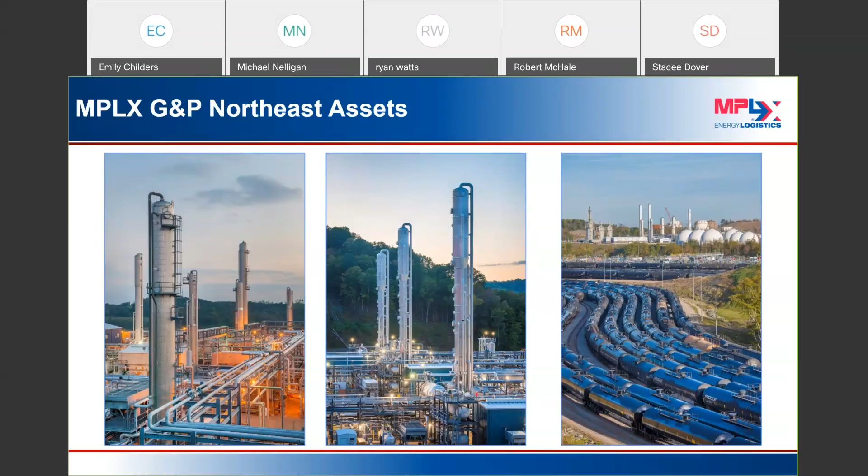Just a little fun fact for everybody. One of our smart engineers calculated the number of rail cars we load on an annual basis and translated that out to feet. And as it turns out, if you had a straight track from Pittsburgh to Tulsa, Oklahoma, you could walk all the way from one location to the other and never touch the ground. So it's a pretty significant amount of rail cars, but I'm not here to brag. I'm just giving you a little bit of information about who we are, what we do.

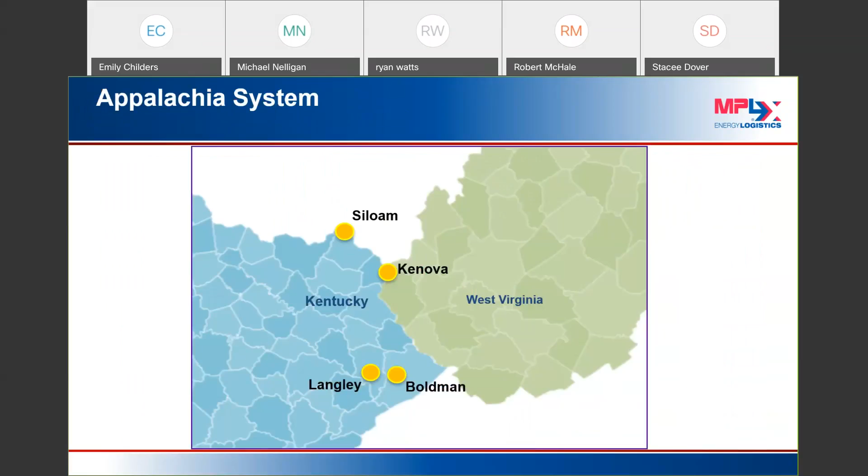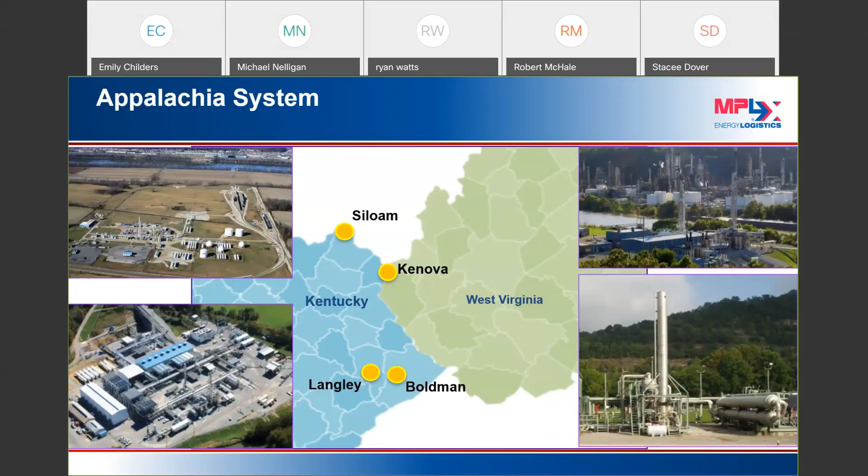All right, so our presence in the Appalachian system, actually MarkWest got its start there in Siloam, but our facilities include, let's see if I can, there we go. Having a little technical difficulties, folks, bear with me. So our facilities include the Langley facility and Boldman, not too far away, just over in Pike County. Our Kenova facility, which is located just across from Marathon Petroleum's Catlettsburg refinery. And then the picture in the upper left there is our Siloam facility, the beginning of MarkWest in its current configuration.

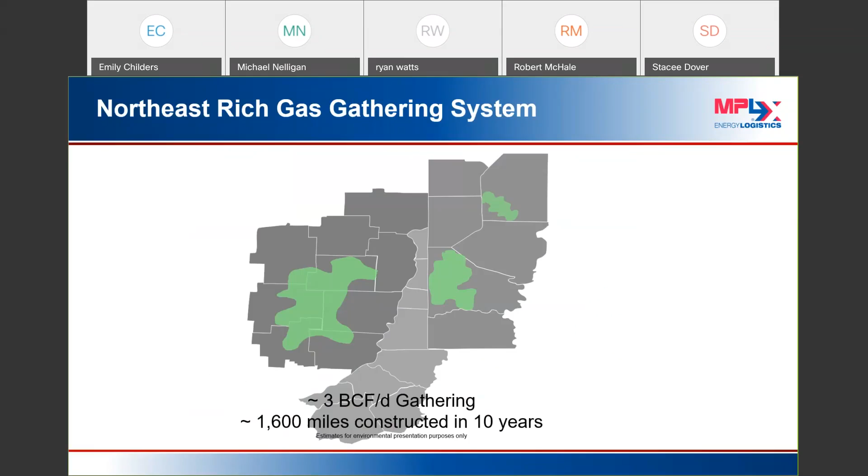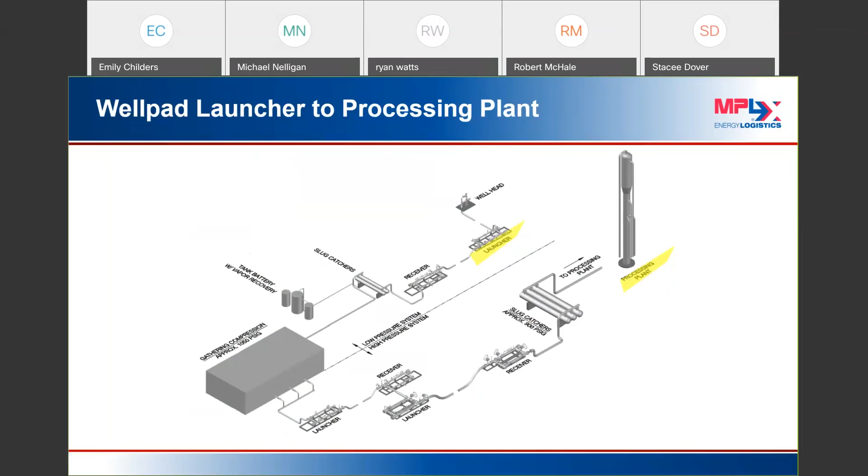All right, so where we pick up is from, let me see if I can make this work. There we go. We pick up from the launcher at the well pad and all the assets in between, from the low pressure receiver, slug catcher, down to the compressor station, and on the high pressure discharge of the compressor station all the way back to the processing plant. So all of those things are the things we own and operate.

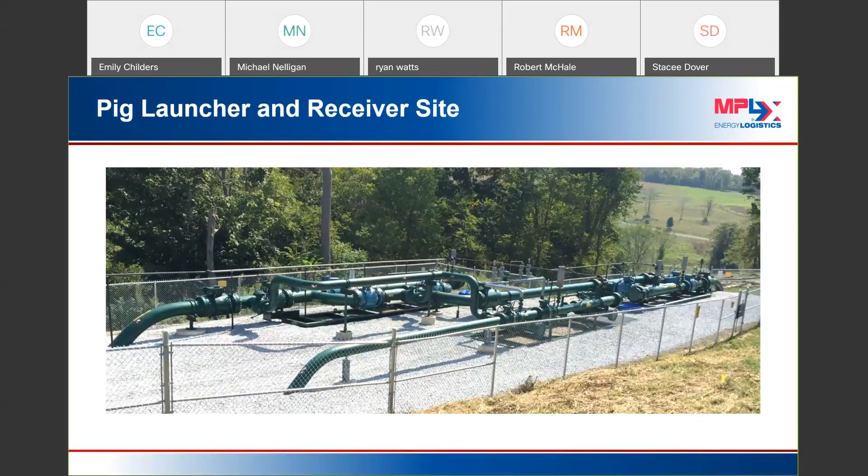All right, just for folks that may not be intimately familiar with pigging, this is a typical, or at least it was a typical launcher receiver site, a remote site, not located at a compressor station.

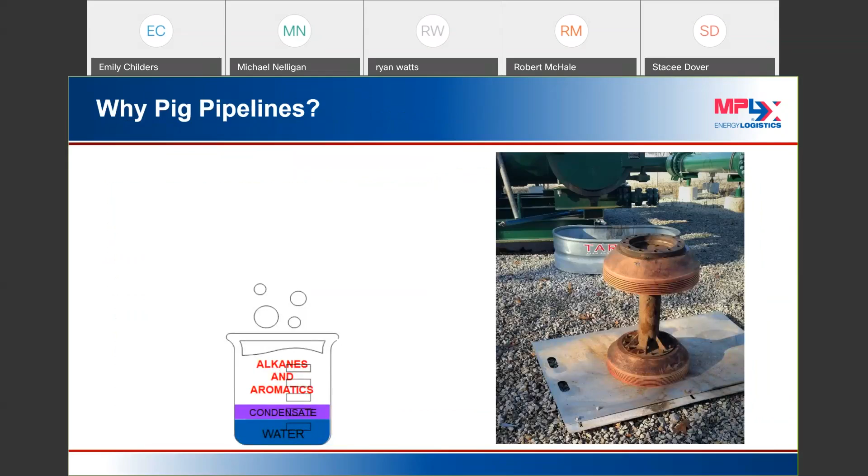Okay, so why do we pig the pipelines? There's a variety of reasons. Number one, you want to manage pressure drop and keep your optimal flow for your producer customers. Number two, you want to keep the liquids, those things that are valuable, moving forward, going from the well pad to the compressor station to the processing plant. You want to recover as much of that and return as much of that as value for the producer customers. We obviously want to manage internal corrosion, so by pigging and keeping the lines clear, we minimize internal corrosion, and we want to prevent the buildup of paraffins in the pipeline.

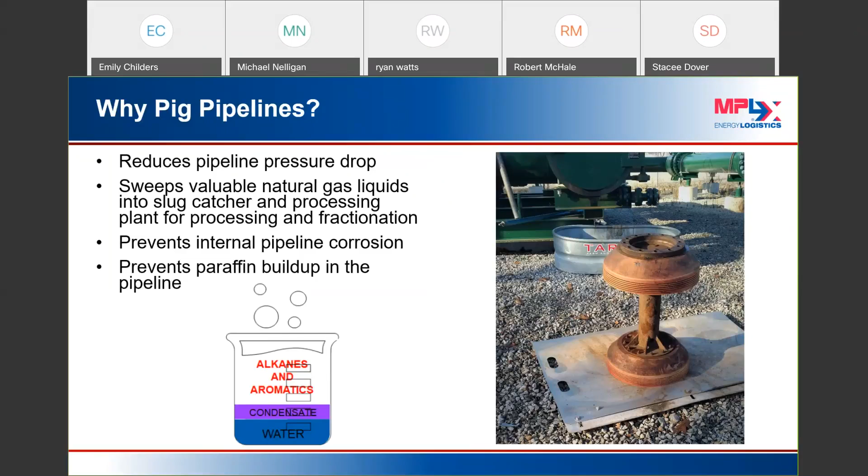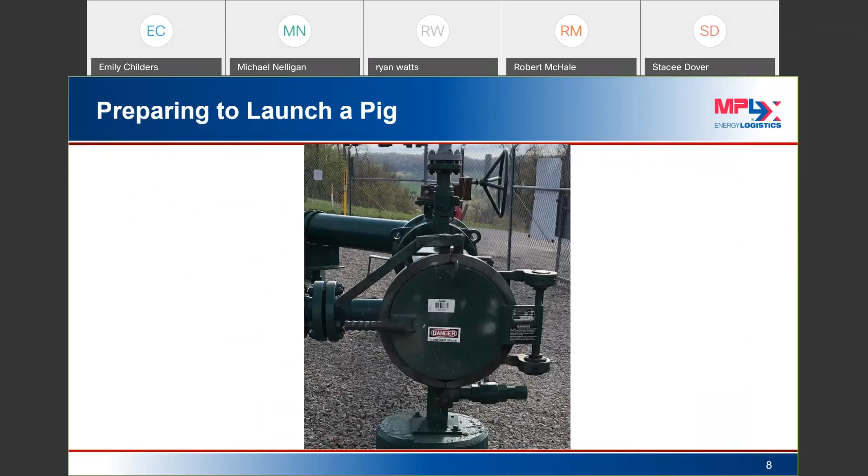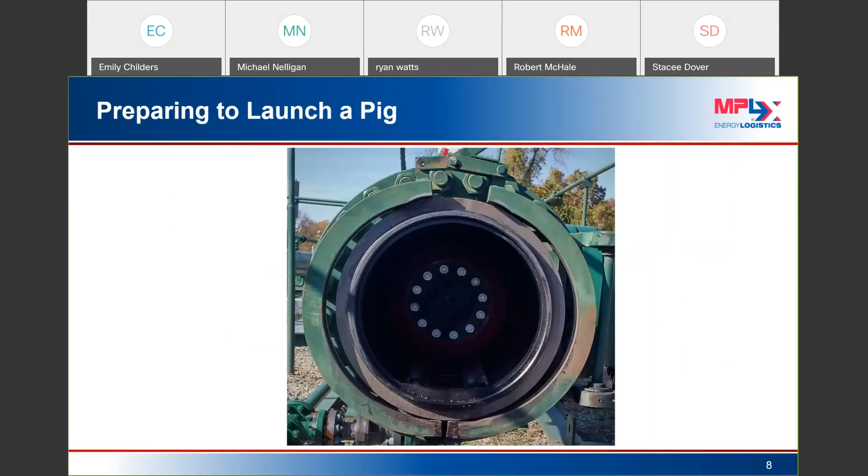Okay, so I'm going to hope that the pictures work on this. We're just going from a closed barrel of a pig launcher to the pig ready to be launched, to loading the pig. All right, to the pig ready to go. Now, I assure you that we will get to something that folks will find beneficial in this. But this is, again, just a little bit of introduction for those that are not intimately familiar with the actual pigging process. So let's see if the little animation works here.

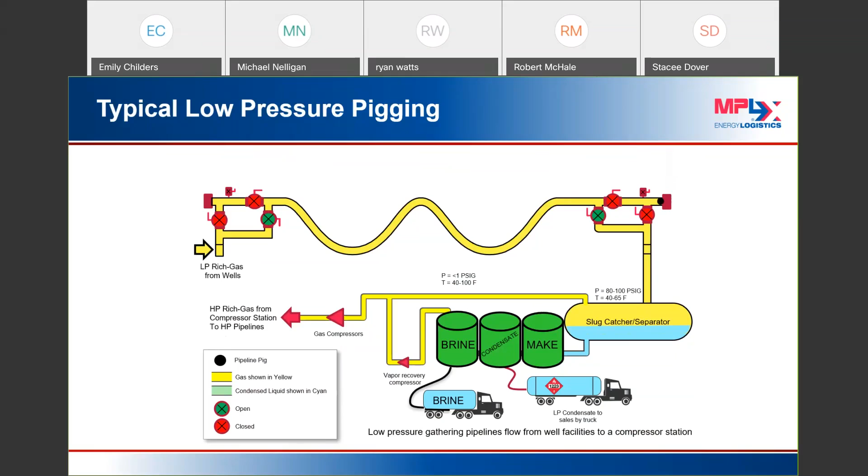All right, now, I had mentioned at the beginning of this discussion that we were the recipients of the first of its kind consent decree, and it was focused around air emissions. We're sharing this information with everybody so that if you are not routinely engaged in evaluating air emissions from pigging, it might be worth taking a second look. And each state has a different threshold for what is acceptable emissions.

So for example, Pennsylvania has a 2.7 ton per year per site limit. This is in VOCs, okay? Now, Ohio actually has a 10 pound per day per unit limit. And what we have found through evaluation is the pound per day limit is actually the greater challenge of all the things here versus tons per year. Pounds per day is by far the most challenging.

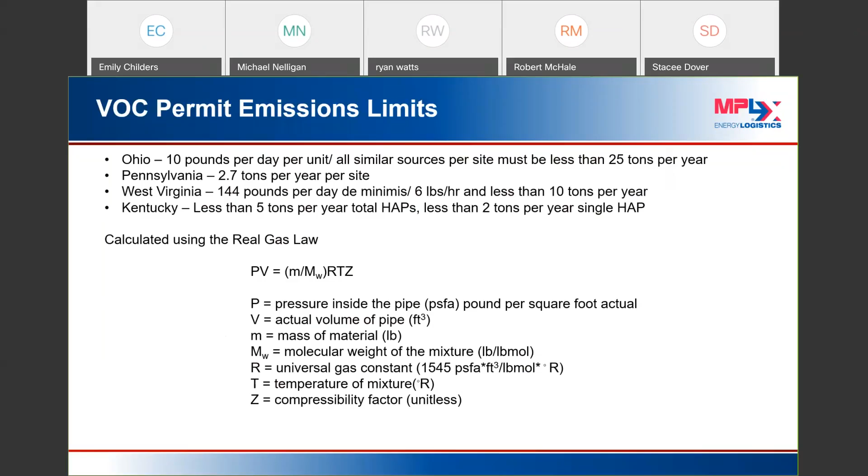Now, I know you'll look at it and say, well, West Virginia has a 6 pounds per hour limit. That is also very true. I will say from our perspective, we have not encountered difficulties in permitting VOC emissions in West Virginia, primarily because we don't have the gas gathering system there. We run an NGL system there. So I will caution everybody on this call to be mindful of the pound per day number there. And the important thing in permitting this and evaluating your permits is that you use the real gas law and not the ideal gas law. Believe it or not, you will find a difference in your emissions calculations. There are various factors in this formula that will weigh more heavily than others. One in particular is the compressibility factor.

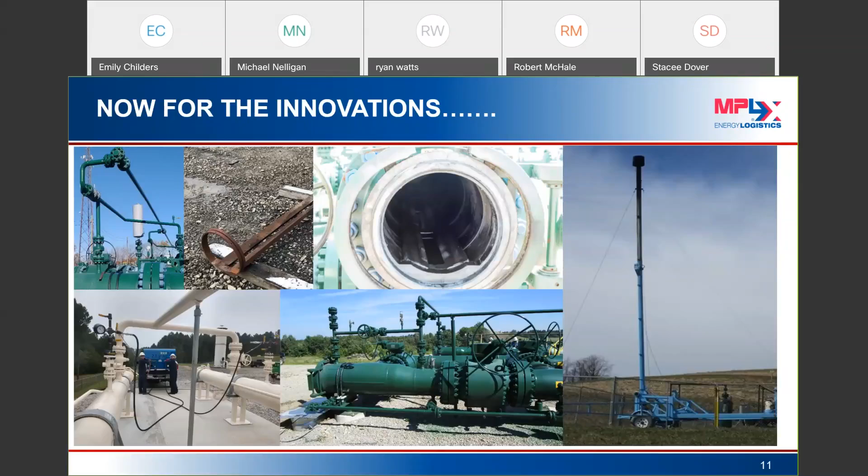Okay, so I had mentioned at the beginning of this, we're going to talk about innovations. I will go through each of these individually for everyone's benefit, in order of least cost to greatest cost. And some of these, I think folks might be astonished to learn how simple innovation can be.

What we have found is that our system is able to accommodate that volume of gas, and it is actually very beneficial to not only the environment by reducing emission, but it's also beneficial to our producer customer by keeping that volume of gas, seemingly insignificant as it may be, in the pipe. And I will tell you that while it may seem insignificant, the frequency with which one pigs can make that volume not insignificant.

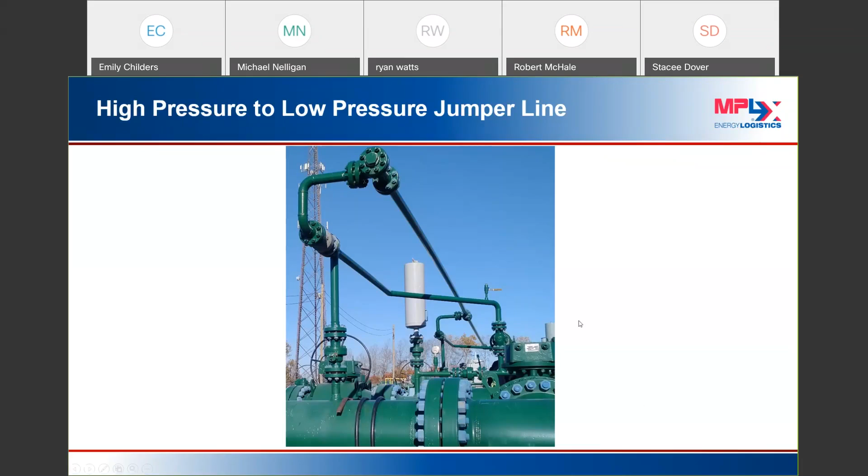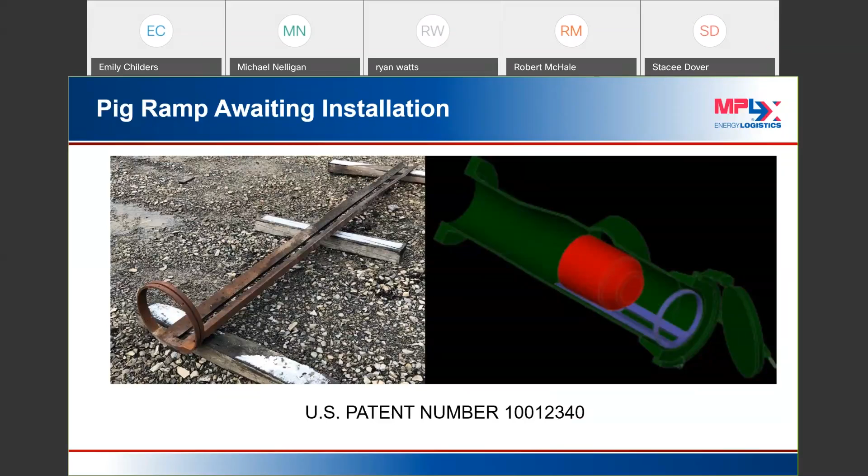What this device does is it allows the pig to run up into the receiver and allows the liquids to drain back. Before we installed these, we had containments that routinely would catch a significant amount of liquid, and we would manage the liquid at these distributed locations. But by allowing the liquids to run back into the pipe, we're able to essentially pig it to a more centrally manageable collection location. It reduces emissions at the launcher receiver door, and also allows for easier management of the liquids.

And that is what a pig ramp looks like installed in a pig barrel. Doesn't look like a whole lot when viewed.

You will see in this presentation information, and you may have seen it in the invitation, a link to the MPLX website. In that website you will find the specifications for fabricating that pig ramp. That sharing of technology is also something that has been agreed to in the consent decree, and we are sharing this design with the world free of charge.

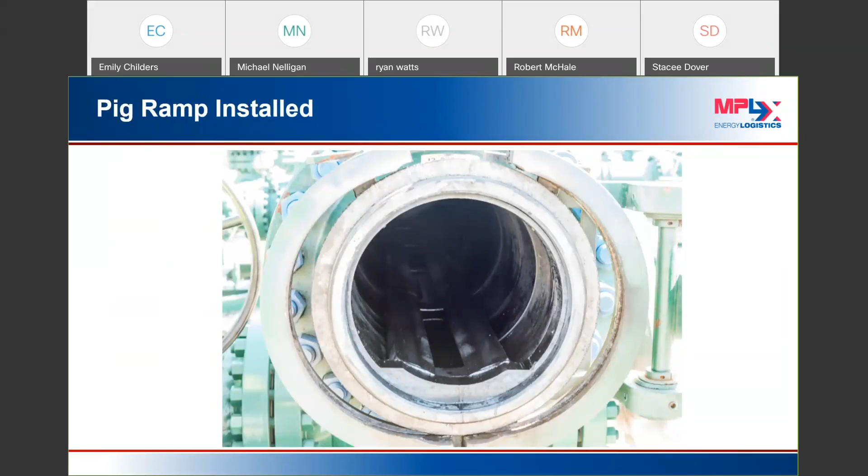So the next innovation, again, may not seem particularly innovative, but I will tell you that we had originally built our gathering system with longer barrels to accommodate an inline inspection tool. One of the downsides of the longer barrel is that it is more volume and more gas to manage. So what we have done in response is switch to a shorter barrel design, acknowledging that when it comes time for inline inspection, we have to unbolt the short barrel and install a long barrel to accommodate the ILI, or inline inspection tool.

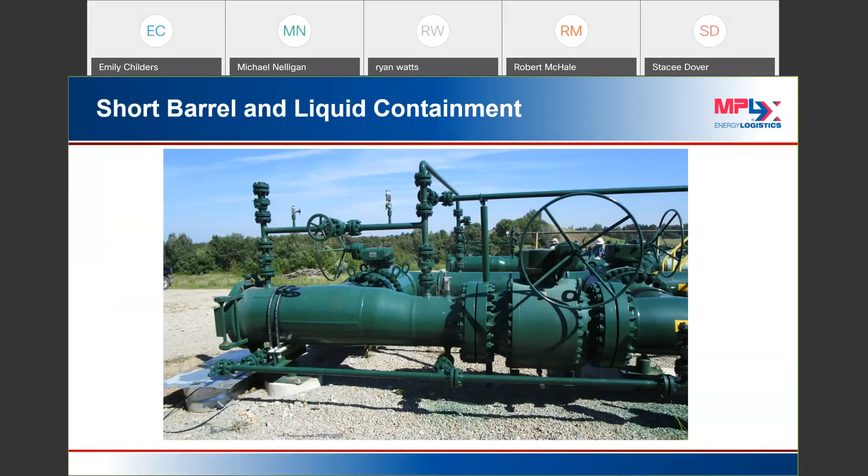But the trade-off is that for 99% of the time, we have a shorter barrel and less volume of gas to manage, thus reducing our emissions at the location.

The next device we've employed is the portable flare. The portable flare is a very useful tool in converting VOCs to its combustion byproducts, CO2 and NOx. Being that this is a trailer mount, we can tow it from location to location. It's not without its downsides, as you might imagine, toting a trailer like that across the countryside is not without its challenges. It's also not without putting a flame in the sky, albeit for a temporary period of time. But it is an effective tool in controlling emissions, and is one that folks could consider if warranted. I will tell you, it is on the higher cost side of the innovations that I'm presenting.

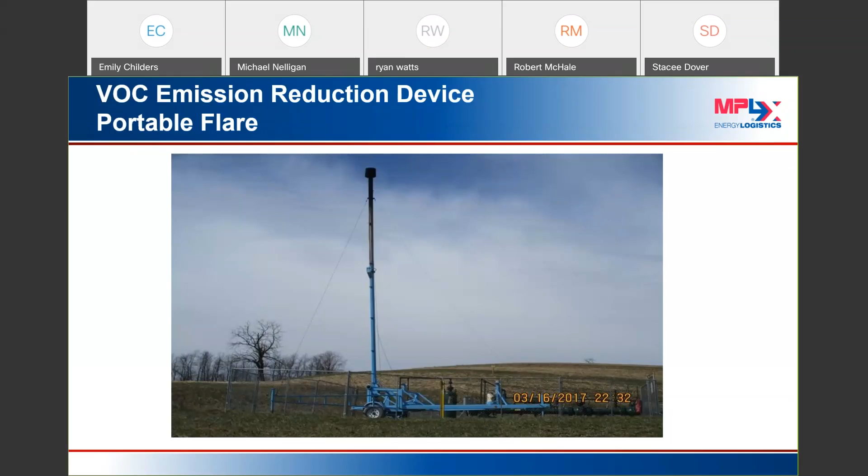Okay, so the next one is this device called ZEVAC. Some folks may have already encountered this company. They're gaining popularity. I am not here selling anything, I get nothing, give nothing to ZEVAC. But point of fact, we did work with this company. They're based in Oklahoma, and we were essentially their test lab, their guinea pigs, for developing a system that allows you to move gas from one pipe to another.

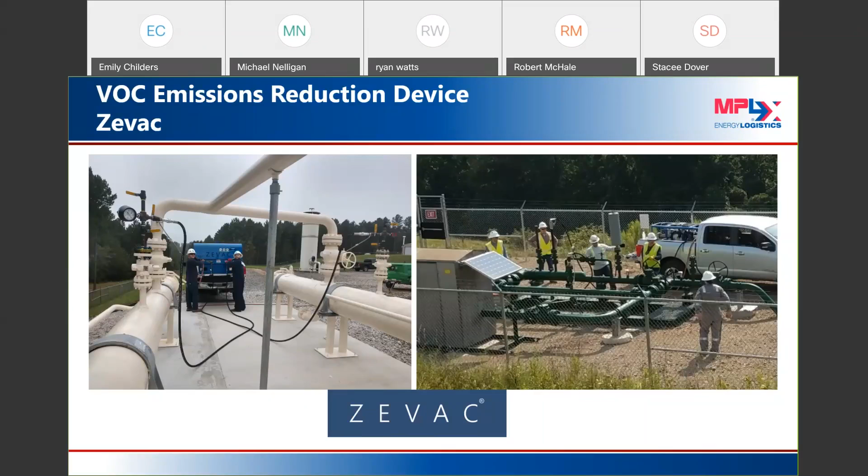So by running, if you think about it in terms of an air compressor, similar to an air compressor, except you're a portable compressor for natural gas. I believe in my last conversation with the folks at ZEVAC, they're working on expanding their product line to other purity products and perhaps NGLs as well. They're easily found on the internet if anybody wants to go look them up. I suppose folks can email me directly as well, and I can provide contact information if desired. But we have been working with them for a couple of years now and have found a mutually beneficial relationship.

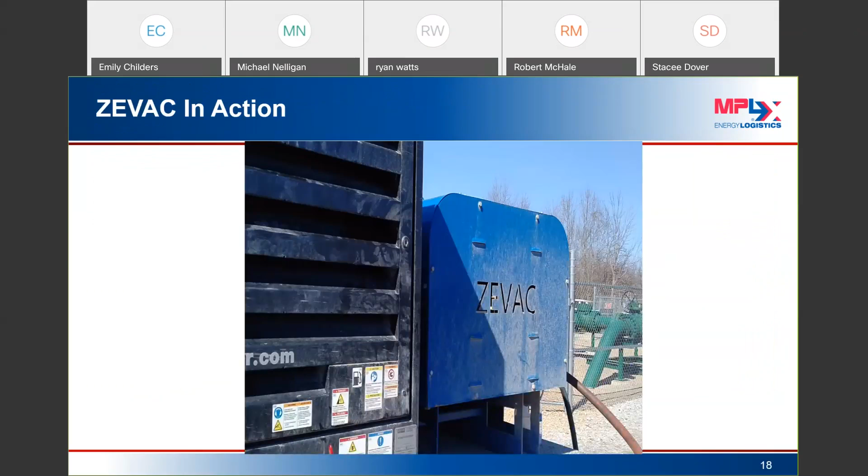So I think the next slide here is a video. I hope it plays, it's not very exciting. Forgive the rudimentary photo skills here, this was shot on a cell phone, my cell phone for point of reference. And if anybody could hear the audio, I assure you it would sound like an air compressor and little more.

So that is the exciting video of the ZEVAC in action.

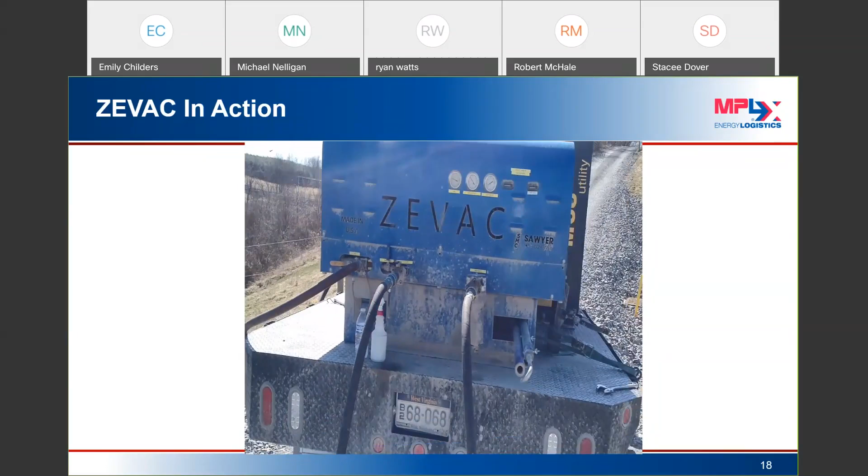So I talked about the emission reductions. What we had calculated before implementing all of these emission reductions was that we had a 0.02% total volume of our gathering system estimated to be lost from launchers and receivers during the pigging operations. After we put all of these various tools into place, we reduced that amount by 84.7%, so that our emissions from pigging is now 0.003%. Depending on the magnitude and the frequency with which a gathering system is pigged, that could seem insignificant or significant. I touch on this point again to remind folks that if you own or operate a gas gathering system, it might be worth your time, if you've not already done so, to take a look at your emissions.

And if you find that you have significant emissions, you might employ some of these technologies, not only for the sake of reducing your environmental footprint, but from a perspective of keeping more gas in the pipe and generating more revenue.

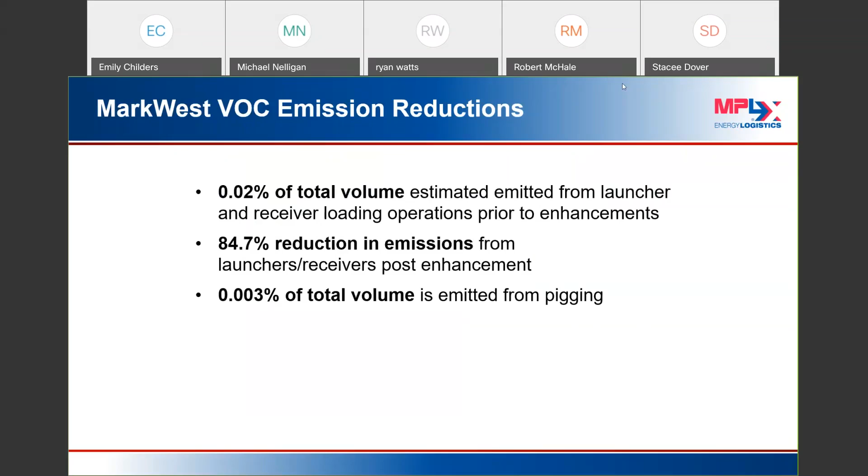So I mentioned before that we were sharing this technology with the world royalty-free. I can tell you that I have fielded calls from people, just random people, who have stumbled across this. I suspect they were pointed to it, but either way, they found us, and that's great. They found the design, and they worked at metal fab shops, or they owned metal fab shops, and they wanted to know if they could indeed fabricate these things and do with them what they will. And of course, the answer is yes.

It is public information. Our hope is that folks that own fab shops, folks that own gas gathering systems, and know people that own fab shops will actually go out, get these designs, build things, and use them. It raises the state of the industry. It is a boon for the environment. It is a boon for the operators of the gas gathering system. And quite honestly, it could be a business opportunity for someone wanting to expand their product line. They're very simple to install, and they're very effective.

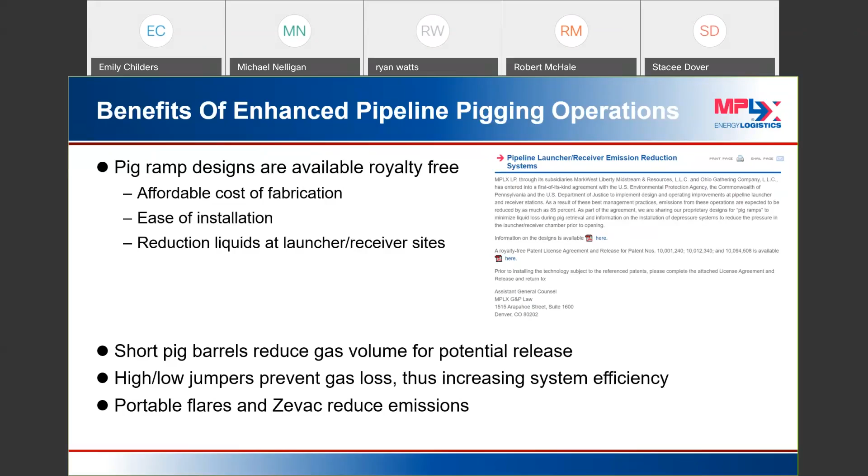Okay, and with that, that takes me to the end of my stock presentation.